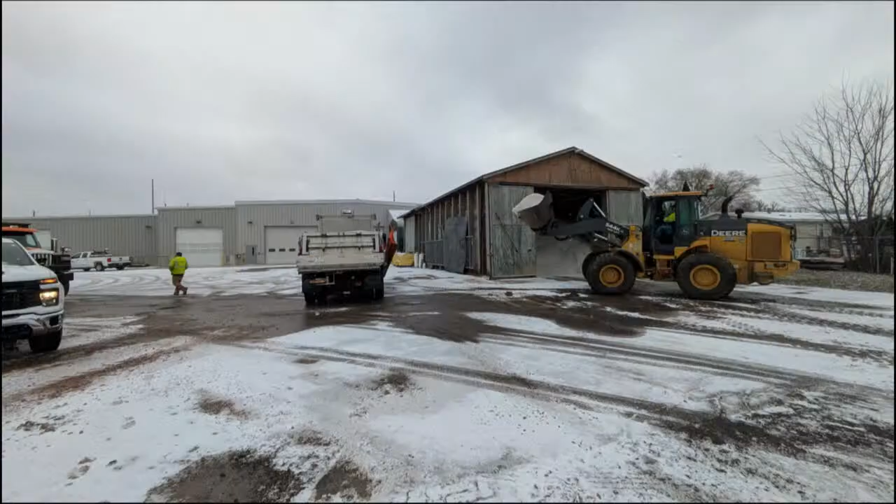This is just a shot, if no one's ever seen this, in the back of our yard. This is our salt shed. We are loading up trucks here. Dwayne is very proactive about monitoring our quantities, making sure that we're always going to have enough for any snow event. This is just loading up the truck.

With the lack of snow, we've also been taking advantage of the opportunity to fill potholes. It's always nice when you can do it now instead of having a million of them in the spring.

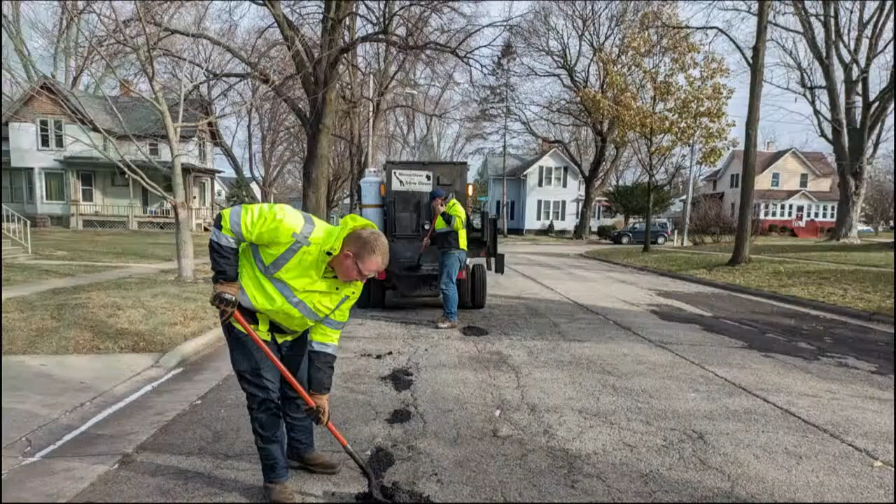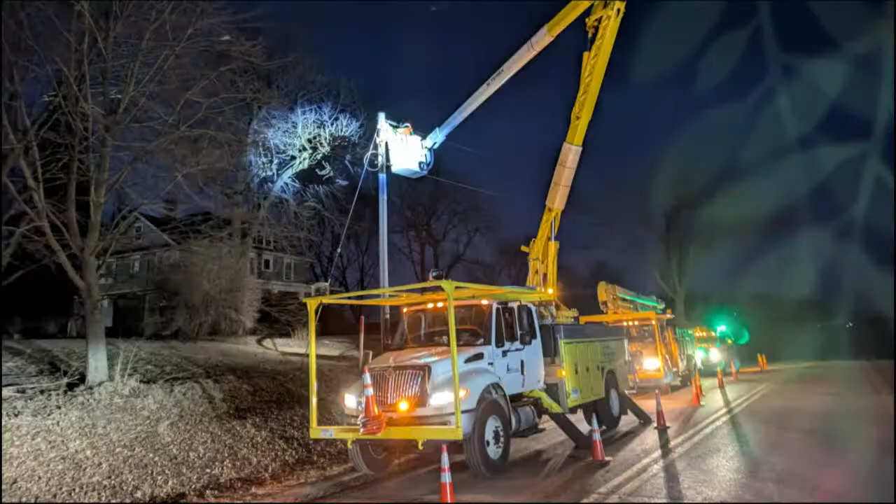Electric department has been very busy. The recent windstorms last week caused a number of localized power outages, so we're doing a lot of troubleshooting, a couple of late nights, particularly out to the north of us on Highway G, near Dolph Dairy. The high winds were shaking that pole, and it actually broke the cutout, the ceramic cutout.

What was most dangerous out here was just the traffic. There wasn't a lot, but when cars would come in, they just don't slow down, and it gets very dangerous.

Here they've replaced the cutout, which is up there, and one of the linemen is now using a stick to close it, and it was successful, so we were able to move on from this.

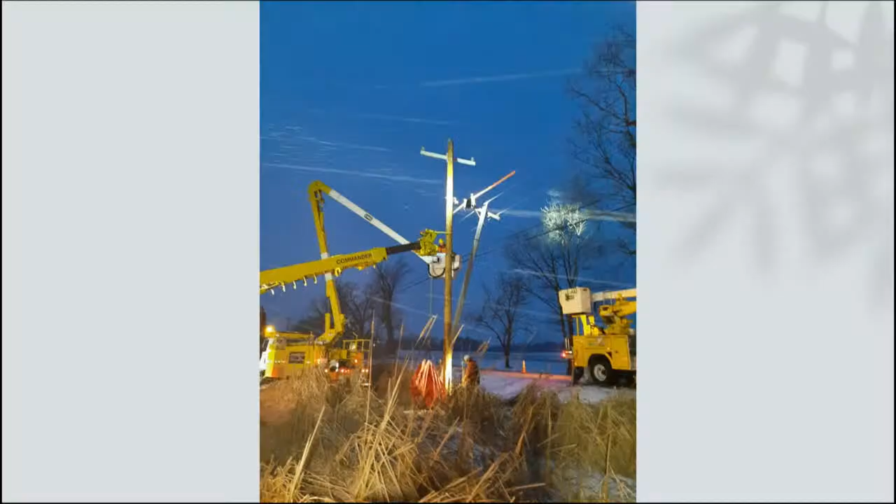Then further up the road, this particular pole, the one on the angle, had busted right at the base. A lot of these poles are older, they are in very acidic soil, which eats away at the wood. So this is a frequent occurrence at times in high winds.

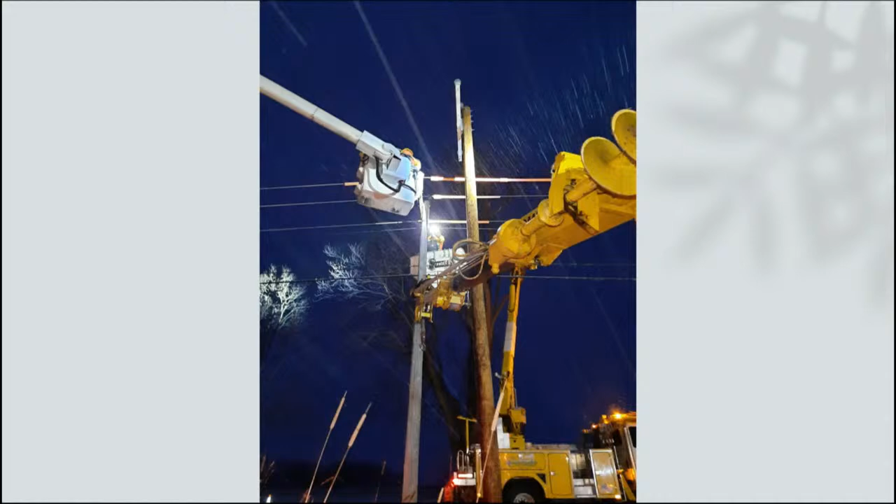They're planting the new pole, then they're gonna hold this one and then remove it. That's what they're doing there. The arm there is clawing onto the old pole and they're taking it down now.

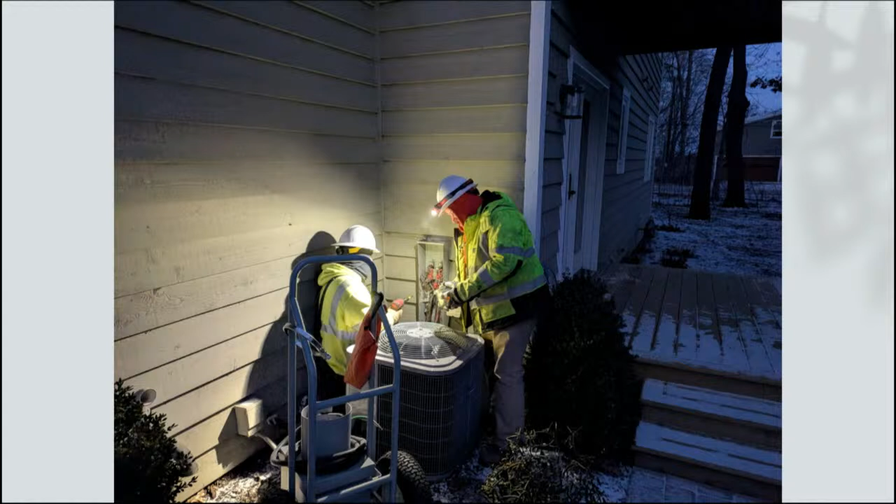That's what the fellows are doing here. They're attaching the service saver and then splicing it in with the existing lines there, the 3 power lines, and then they're gonna come back when temperatures warm up a bit more, but this house was able to maintain its power then for the next 3 days.

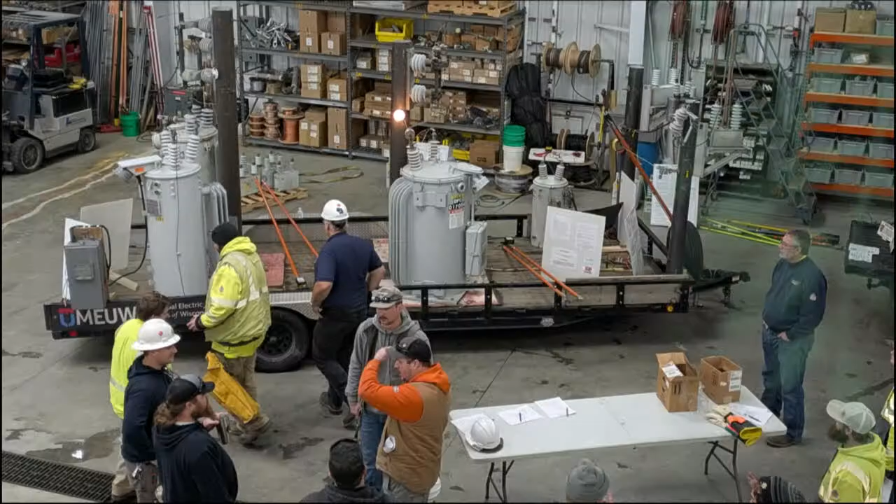Last week, MEUW, they are a safety organization, hosted their regional safety seminars at our facility. So all the local municipalities that have their own power companies gather here, and they bring in this really cool trailer. These large transformers are dead, but he has rigged them so that

he plugs them up to a 120 volt, they are re-energized. And then the crew just, this is a training day. Safety is paramount. It's so quick that an accident can happen, and it can be fatal at times or cause serious injury. So it's very important that these crews, everyone meets about twice a year and performs a number of routine tasks.

Here's two of our guys, this is Austin and this is Lucas. They're just practicing what they actually were working on last week, a recloser or a cutout. This gentleman here is from Columbus.

And they're just wrapping up the lecture time.

Another big project we have just tackled, this is the CP substation. What we have here is our 25 kV line coming into it, and then it transforms down into our 4 kVs, and this is circuit 1.

We have had a problem with what is called a recloser. I believe I've talked to the board about this, tried to explain some of it. We've had a recloser that's been out for some time. This type of system and device is outdated, so it's hard to get new ones, but we were able to reach out to another municipality in Hartford that had an extra one they did not use, and they graciously gave it to us at no cost.

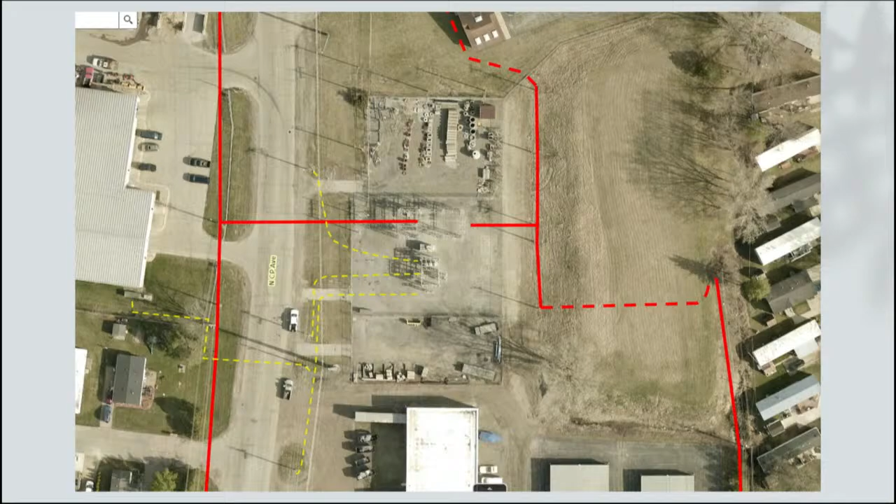This is typically, if it's the fault, it could be a branch that fell on the lines. So this will turn back on its own, but if the fault still exists, it will go out again, and it will try one more time or 2 more times to kick it back on.

After the third try, that's when it will shut down completely and we'll have to head out there. This is how sometimes you'll get a blip, because this recloser is turning the power back on automatically.

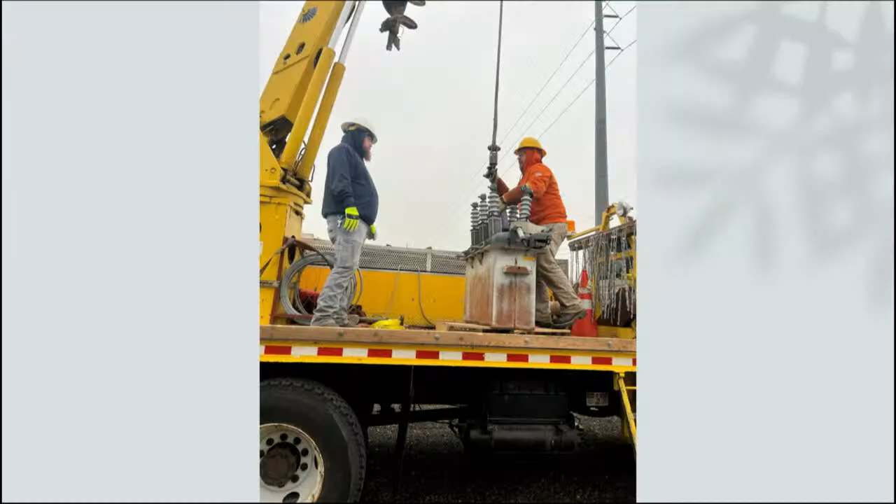But this one had malfunctioned and had been sitting dormant for about two months. The crews, we were very lucky to get a used one. Here they're putting the refurbished one back in. We anticipate having to keep that there for a year, and then we'll be shutting down the CP substation with some upgrades we'll be doing at our Tyranita substation.

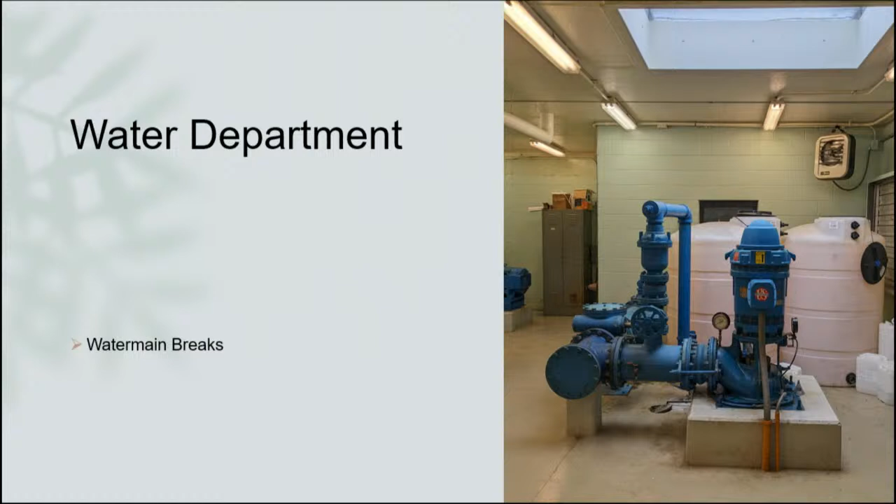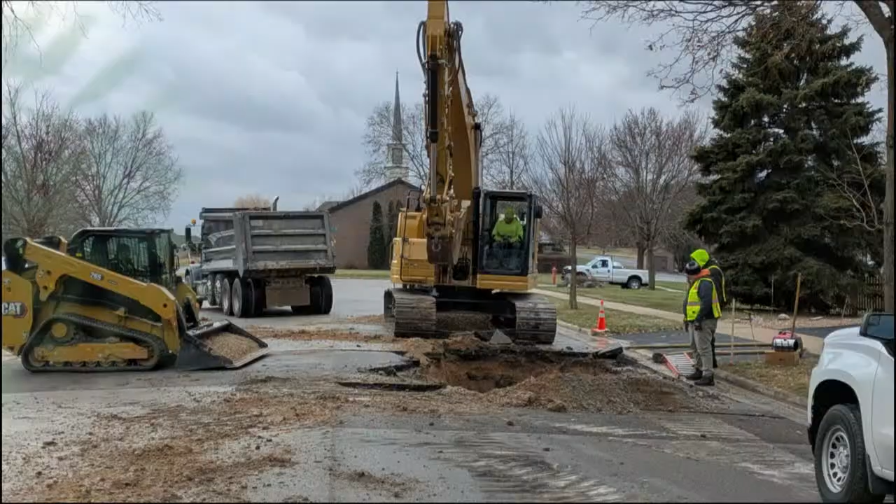The two on Grove - this one here, right at the intersection with Jefferson, was very serious. This is on the top of the hill at Grove. We had to go rather deep for this one.

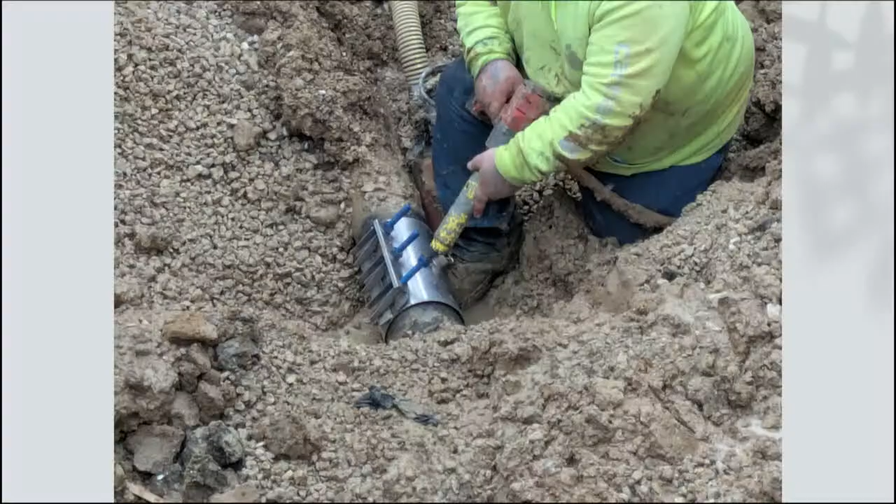What you'll see here is a typical repair. This is called a Hymax sleeve. These come in different lengths and different diameters, but they have a membrane on the inside of that metal collar. You're able to fasten that on and seal up the break, and that normally is 100% successful.

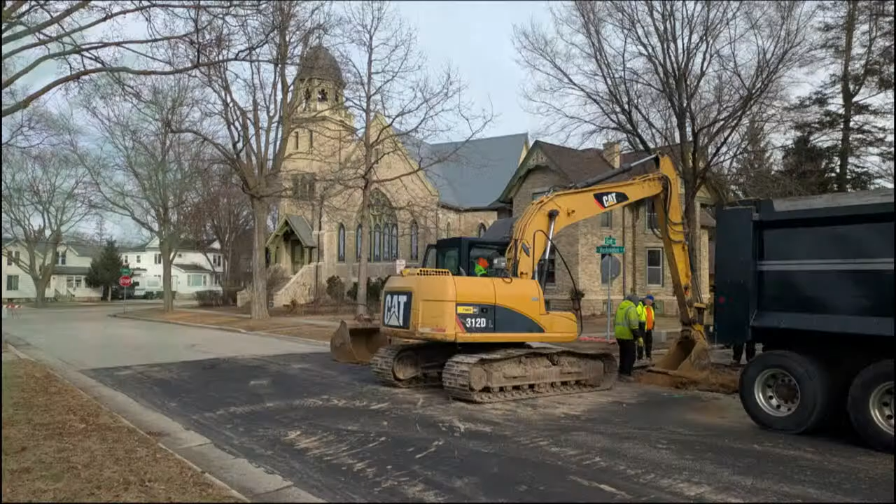This is at Washington and Scott. This one was a problem to find - it was not immediately evident where the break was, so we had to go searching for it, and the hole got a bit larger than we wanted, unfortunately, but we did eventually find the repair.

Now this one was at the bottom of Grove and Jefferson. Unfortunately, it starts freezing then too, so we were having very slippery conditions as vehicles were coming down the road. We spent a lot of time just trying to keep traction there and trying to limit traffic away from the area.

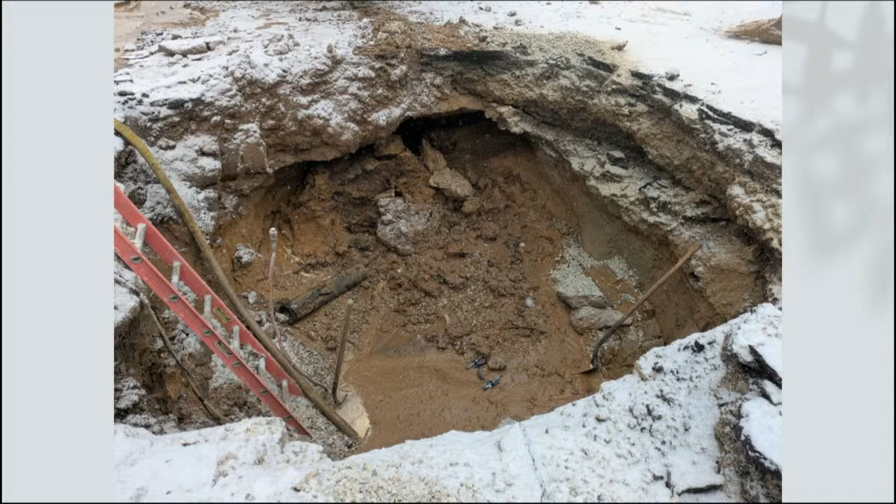Another problem we had, two other problems are evident here. We were having trench instability, so we had to bring in a trench box. You can see the trench caving in here, and this was a continual problem - the more you dug, the bigger it got.

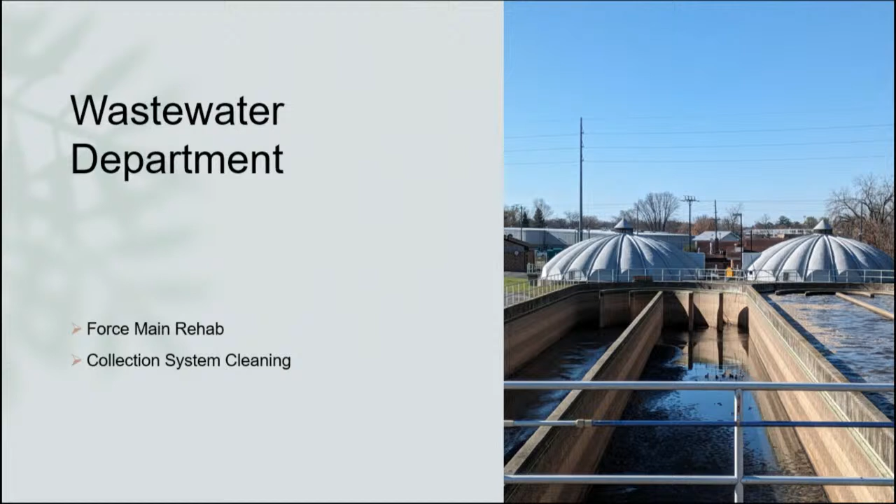In wastewater, we undertook a lining project for a sewer main that goes underneath what is called the Conger Canal on the other side of the lake. One of our operators, two of them actually, were doing their routine televising and televised this run, from one manhole to the next, and found that this pipe that goes under the Conger Canal was in disrepair. So the decision was made quickly, for remediation, to line it.

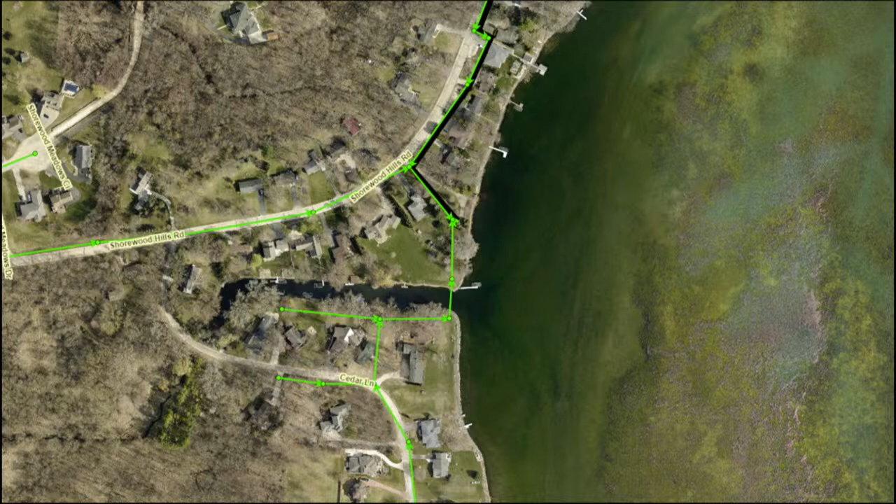Dwayne and I consulted with Bill Kiesling, our foreman, and we immediately contacted Hammerhead in town here, and they put us in contact with a good contractor called Sewer Ninjas. Dwayne and I spent many hours, but the whole team spent about a day just planning and putting together an action plan.

So this is Conger Canal. The flow goes this way, underneath the canal, and eventually up here to a lift station. But this run right here, the pipe is encased in concrete, and it was showing a good deal of deterioration.

I was told by one of the neighbors that when they conducted some dredging out there, they observed the excavator getting hung up on something right in this area, and instead of being cautious, just started tugging on it. We saw no signs of a break in the system, but there was just some disjointing.

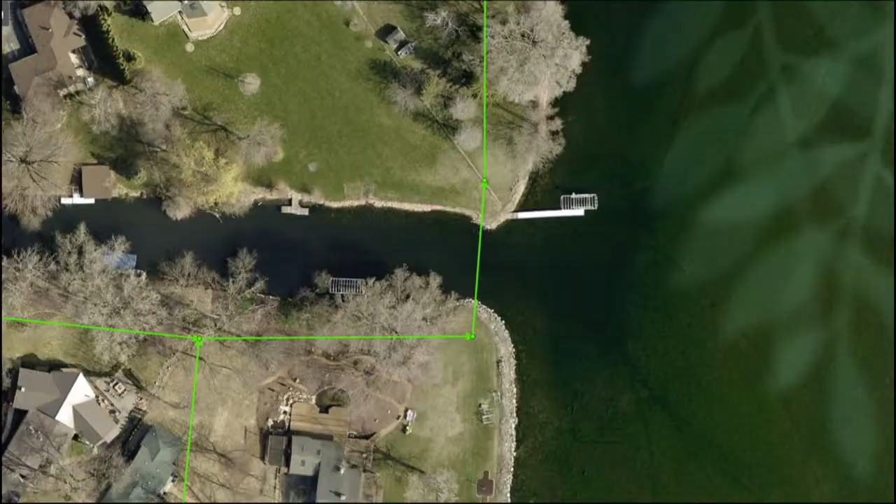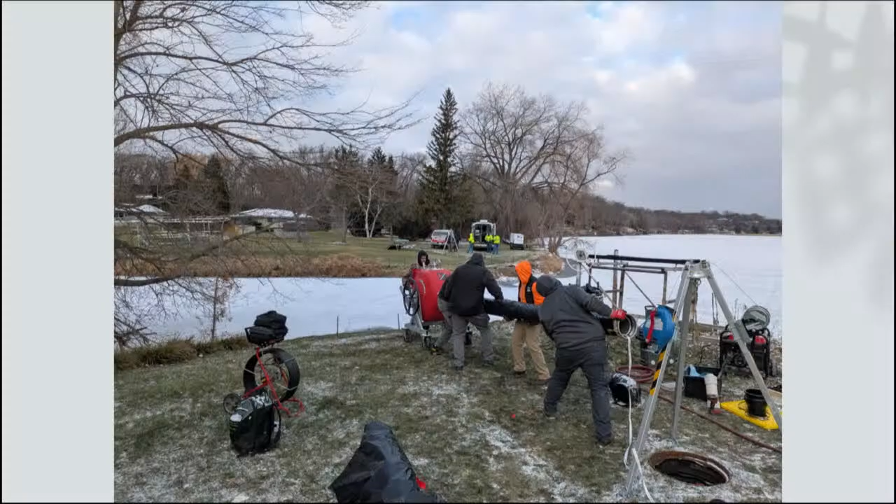Slide. So this is the delivery system. They're going to lower this down into the manhole and into the pipe, and then they start injecting their... what would you call that, Dwayne? I'd call it a polyurethane type liner. Slide.

Slide. Before we get to the two videos, I just want to say that we currently have two projects open. Matt here is going to be discussing the Milton Street and Linden Street projects. But if you could play the first video, please, Dave. No, that's the second one.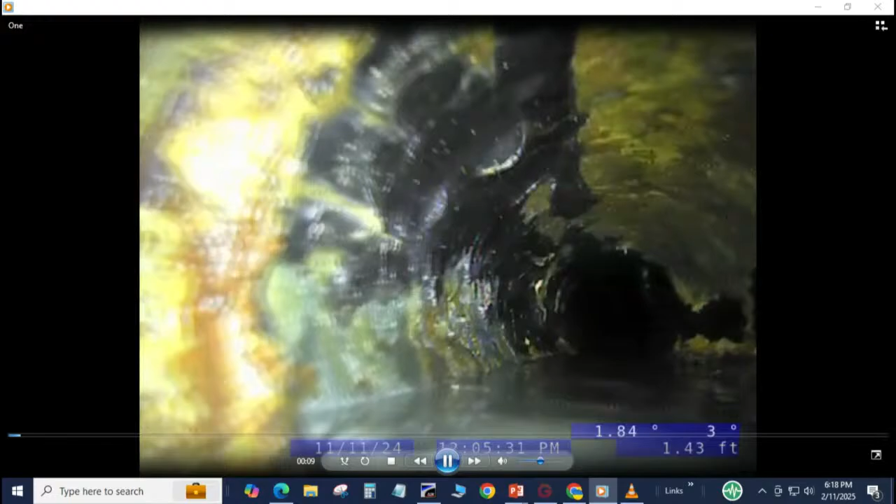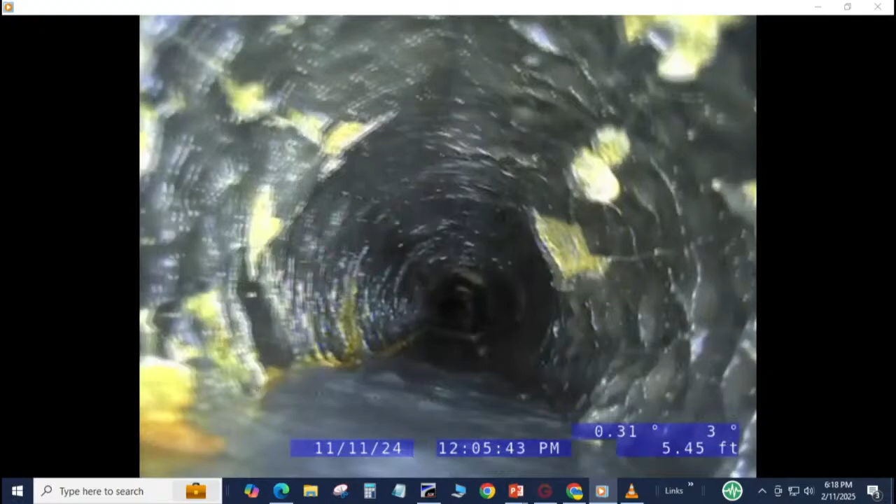All right, hit play. So this was the initial televising of the pipe. We are going underneath the canal, starting on the north, going south. You can see the metal pipe here is corroded away. This is concrete here, the encasement, and many examples of that. So it was determined right away that we needed to do something.

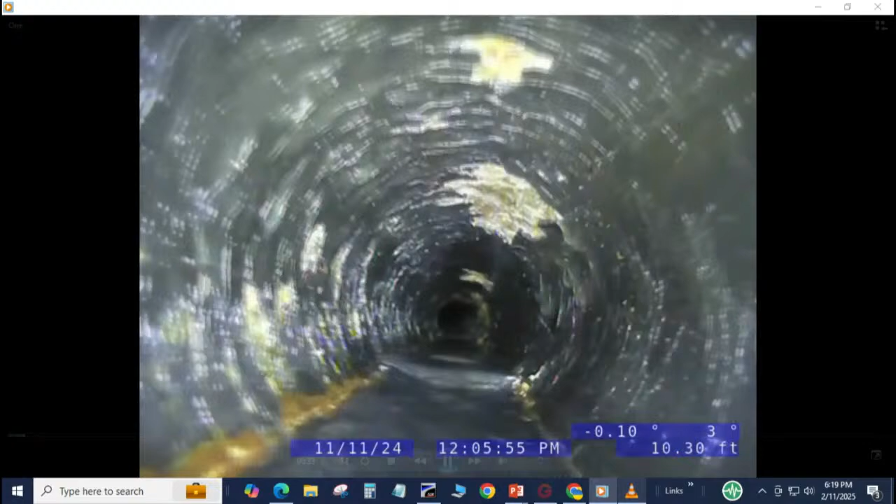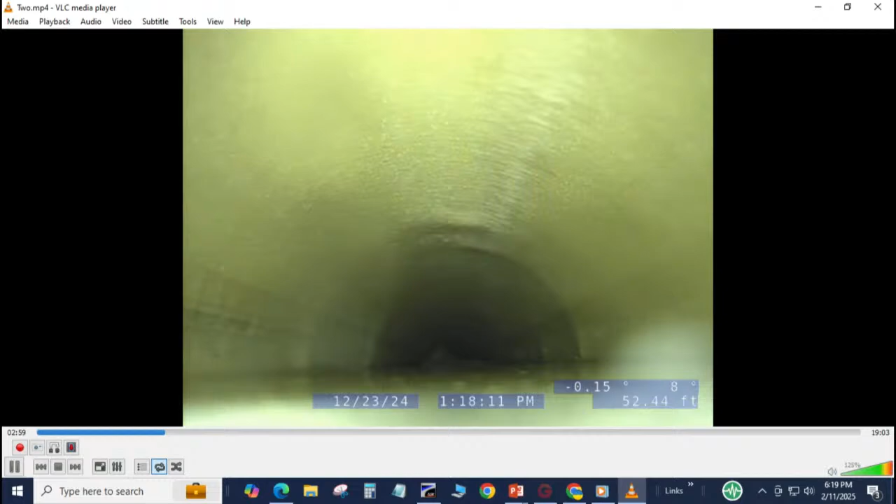Okay, you can stop that, Dave, and play number two, please. And hit play. This is the lined product. You can see it's much smoother now. This will outlive everyone in this room, this system. It is a long-term solution. Not only can the sewer be delivered now, but it will protect the integrity of the lake.

Thank you, Dave. That is all I have for a report. Does anyone have any questions for me? Any questions for Randy? An inch thick. Any other questions? Nope. Hearing none, I guess we move on to the Milton and Linden Street project.

Thank you. Dave, can you pull up the presentation, please? As that's getting pulled up, I've been in front of the board for a number of years. I don't know all of you, but I do recognize a few faces. My name is Matt Hoslett with Strand Associates. I will be the project manager on the Milton Street reconstruction and Linden Street. Pardon me, I'm battling a little tickle in my throat the last couple of days.

The Linden Street utility extension. A little bit of background about me: I've been with Strand Associates for about 7.5 years out of college, specifically working in Lake Mills for about the last 6 years. I've been on pretty much all of the road construction projects the last number of years, starting with Mulberry Street, Oak, College, and all the Brookstone phases we've been up to.

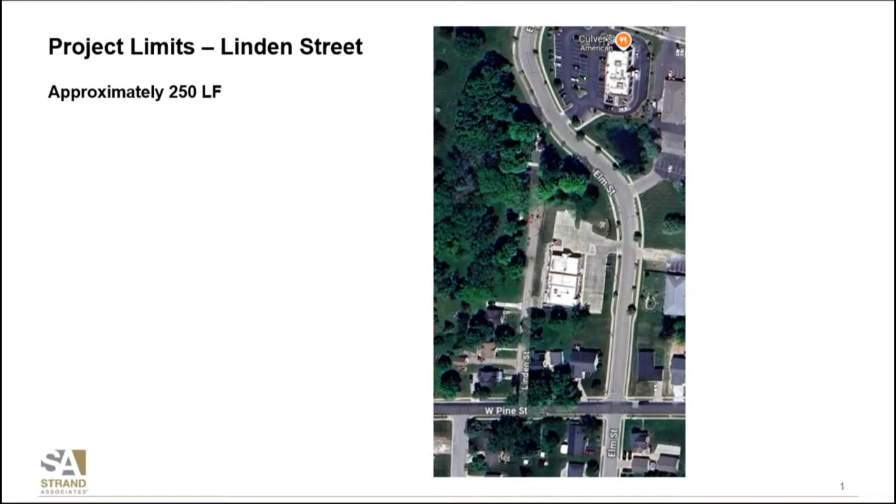Next, Linden Street. Linden Street was added on earlier in 2025 from the annexation we heard about a little bit ago from the Arndt property. This is just going to be a sewer and water utility extension, stubbing out water services and sanitary sewer service for possible future annexations to the other properties. We are only going up about 250 feet from Pine Street. We are not anticipating touching the apron or the concrete sidewalk.

That's a relatively simple construction process. Next, the anticipated project schedule: right now we have the bid opening on March 20th with anticipated spring construction start. We will leave the window open for the contractor to start as possibly as soon as end of April, extending through substantial completion before school starts at the end of August.

While we do have a big window for the contractor to complete the work, we will put a mandated contract completion of 10 weeks upon the start of the project. So as soon as the contractor starts, they will have to have completion within 10 weeks. That helps so the contractor isn't able to leave and be gone for weeks at a time with no work being done on the street.

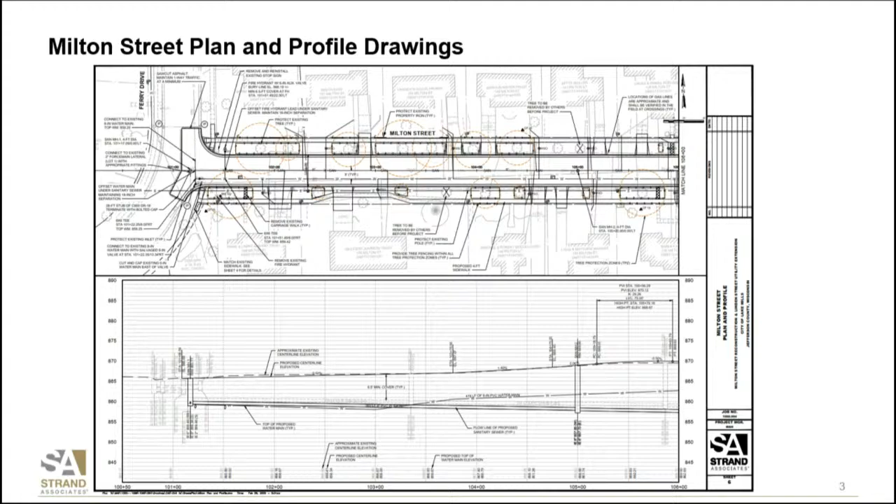Next. So I know in your packets you have the full drawing set. I did grab just a couple sheets here of the plan profile drawings. It shows the replacement of the sanitary sewer and the water main along with sidewalk replacement.

You'll see the circles, and I'll touch on this a little bit. Those are our tree protection zone radiuses of each tree that was surveyed from Eric and his staff.

You will note that there is no storm sewer being either added or replaced. That is due to the profile of the road. It is such a short stretch from the high point in the direct middle of the road that the watersheds aren't large enough to have a storm sewer system. There is storm sewer on Ferry Drive and on Main Street that will collect the storm water.

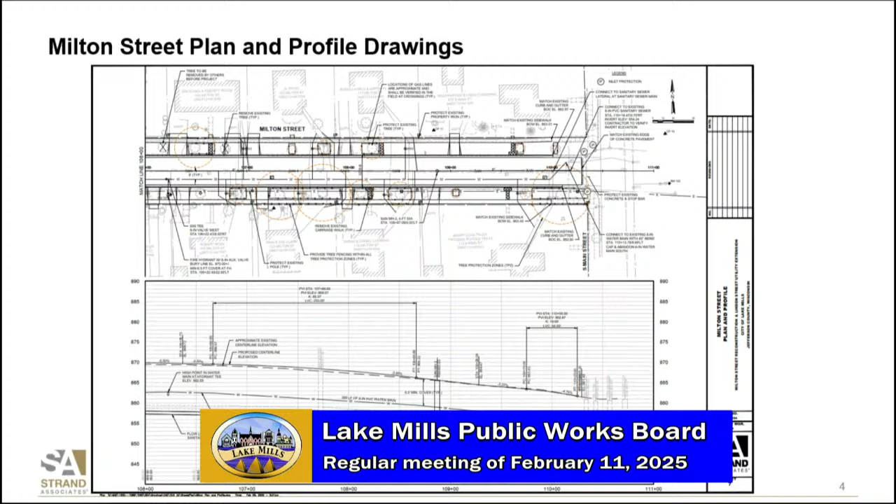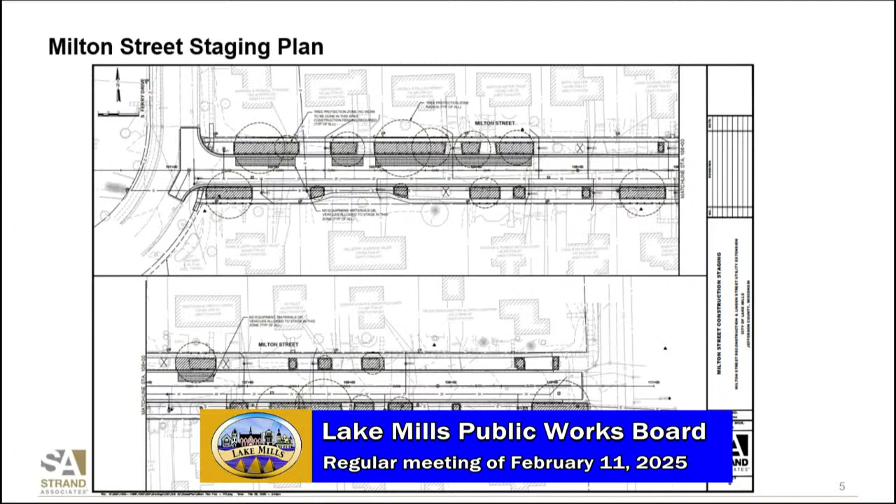And like I said, I'll touch base more on the tree protection policy as we get later on here. Next, Dave.

As I mentioned, Linden Street is a sewer and water only utility extension. We are only replacing the roadway width. We are not adding curb and gutter to this, as it is basically a replace in kind project.

Asphalt replacement, we will have on the south side of Linden Street, there will be what's called a screed curb that is going to be formed with asphalt to allow basically the collection of water.

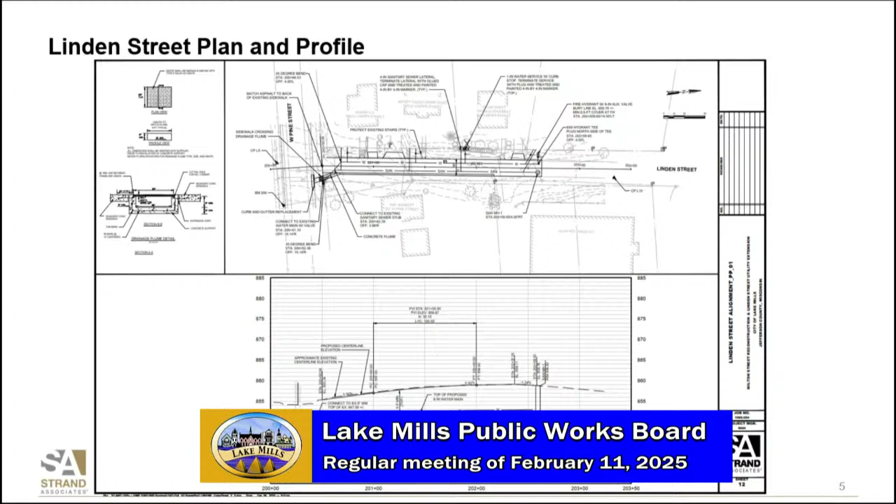As you're looking at this, all the water drains from the cemetery down to the south. We're looking west or south to north, left to right. So from the west side, all that water comes down. So to help eliminate water going across the road as it is now into that property on the east, we're going to be catching it with a screed curb that will have about a 4-inch lip at about a 45-degree angle.

That will catch that water and bring it down to the sidewalk there, which we are proposing to put in a concrete flume that will go underneath the sidewalk and then outlet onto Pine Street and then east to Elm.

Next slide, please, Dave. So the meat of this presentation is going to fall under the tree protection policy that we are incorporating in this project. This is the first year, obviously, since it was passed in June of '24, that we will have a tree protection policy in place during construction.

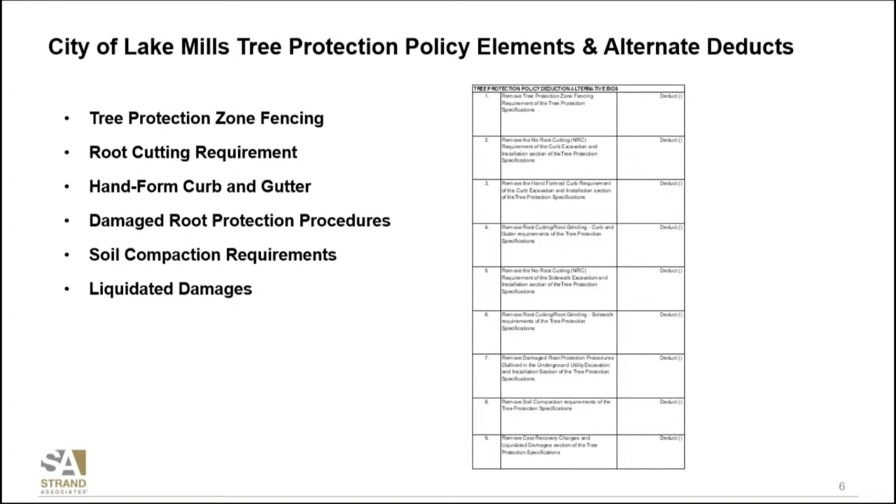We will include the specifications in our contract. The entire project, the base bid, will have each one of these tree protection policy items included. The way the spec is written and the opinion of cost is showing, there will be deductions to help quantify and get a price of what each one of these items ultimately will cost. It is hard to quantify, I will admit, because we don't know how much it is going to cost for each one of these items, but let's just go through each element of the tree protection zone.

We have the fencing. That will be an orange fence that will be from the back of the curb to the front of the sidewalk in the terrace, and it basically shows no work allowed in that zone.

There is a root cutting requirement. Everything is kind of spelled out in the specifications. It spells out different size roots that possibly are damaged and what to do in each scenario. There may be cases of hand forming some curb and gutter when a machine pour curb and gutter is not allowed due to roots that are in close proximity of the excavation for the curb.

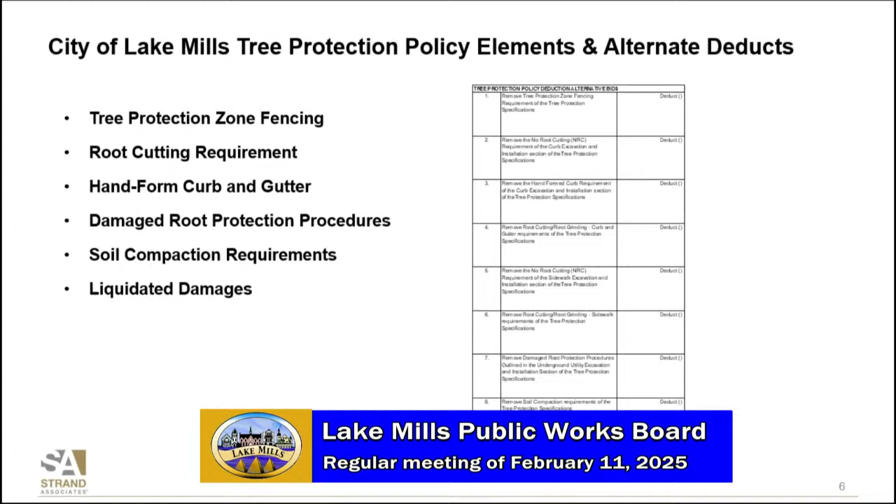There is some language in the specifications about what to do during damaged root protection procedures. So if a root would be damaged, what kind of actions to go through to help clean cut that root and help seal it up.

Soil compaction requirements. There are soil compaction requirements, that is primarily showing that staging plan that I referenced, to not allow any heavy equipment or machine or material stationary right over a tree root. But these tree protection zone fencing will help the contractor not place material or equipment within that zone. At the end of the specifications, there is language about liquidated damages on a number of different items.

There are liquidated damages for root damage. This was the development of a tree protection policy during city infrastructure projects.

The council last year adopted it as a pilot. So what they wanted to do is go through the bidding process and quantify what the cost of implementing these procedures is going to be, which is why you see the deducts listed there, so we'll be able to see exactly what the cost of implementation is on this project, so a decision can be made and a cost-benefit analysis can be completed.

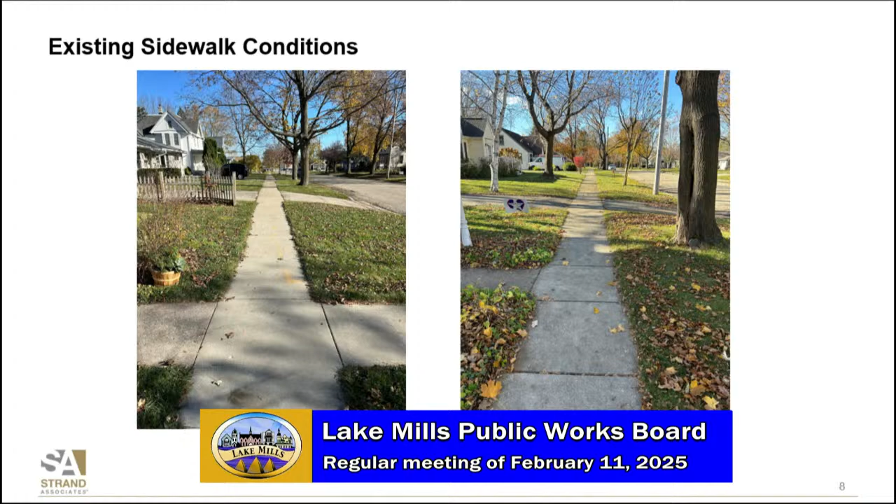We did that on College Street two years ago, and it wouldn't add a unit cost for spot replace, because everything is going to be hand formed anyway. So it's not like it would add additional labor cost if we did a spot replace.

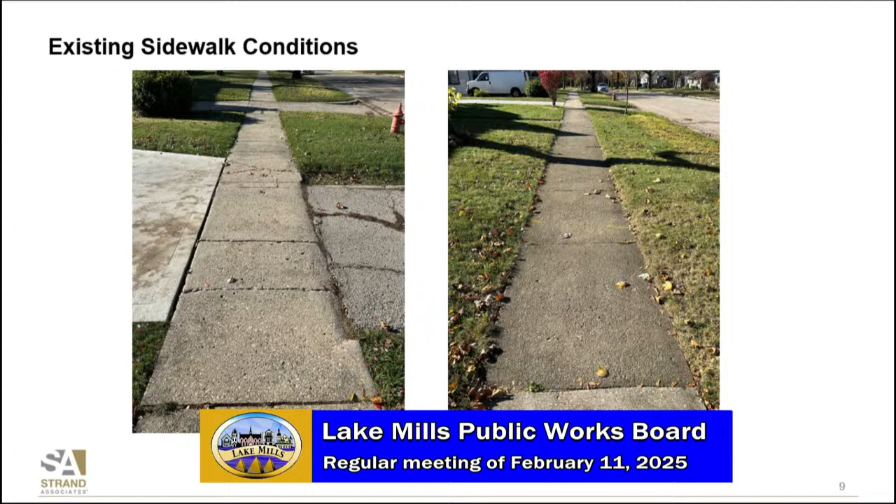These are examples of maybe some sidewalk that we would not save, either heaving, cracking, pitting, where you can see the aggregate in the concrete.

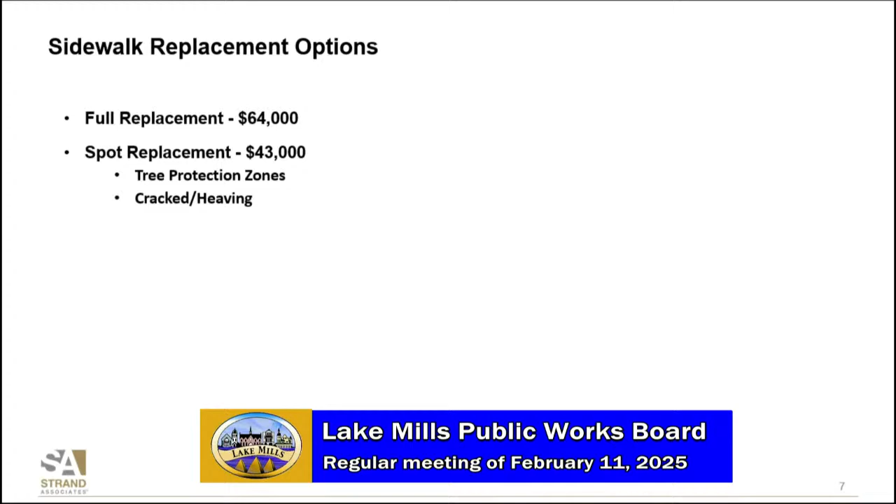Just some costs here to show what I was talking about. A full replacement, looking at about $64,000. A spot replacement, this was assumed at about a third of the sidewalk could be saved, either from the tree protection zones or from the cracking and heaving, quantified at about $43,000. Now, I don't want you to get caught on these numbers, because as we go through construction, if we can save more, then we wouldn't be spending as much on the sidewalk replacement.

The electric on Milton Street, this was added a few weeks ago. A little background, Strand has been working with city staff during the design of Milton Street, more specifically the Milton Street electric. We came to the conclusion of going full underground from the east side of Main Street underneath 89 and then all the way to Ferry Drive with full underground electric. We will be saving 2 poles that have overhead services on those. If you have more questions about that, Randy and I can provide answers to why that may be.

In the contract, the contractor would be responsible for boring and pulling of the conduit, and then the city electric staff would be responsible for the rest of the work. Only thing I'd add there is, as he stated, this would all be directionally drilled, all bored. There wouldn't be trenching, and that's consistent with the tree protection policy as well. I can't guarantee you anything, but we will be shooting to get under the root structure rather than trenching through the root structure.

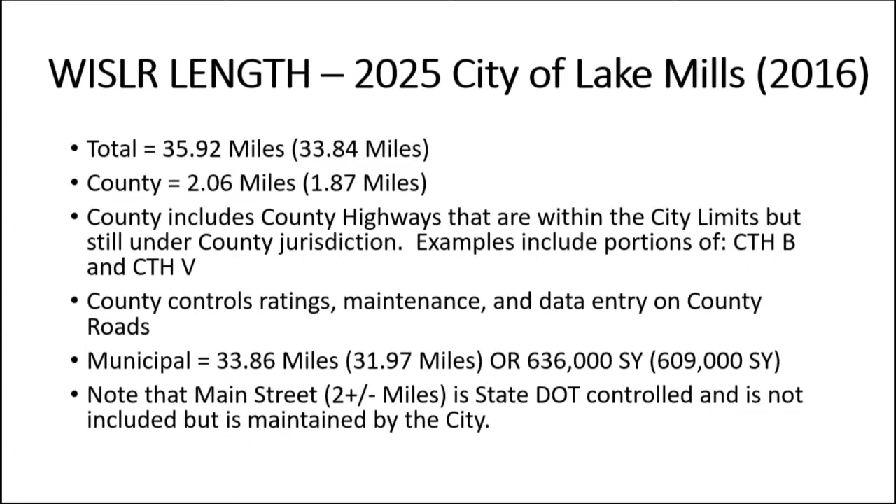Next slide, please, Dave. From 2016, and this is just from the PASER manual. This kind of explains what our PASER ratings are in the Wisconsin DOT database, 10 being an excellent brand new road, 1 being a failed road that is basically gravel.

There are some parameters that we use of when typically a 10 will be a street we just reconstructed, so next year Milton Street will be a 10. It will be a 10 for 1 year. Once that year is over, it will drop to a 9 automatically.

There are, on this slide, some possible treatment conditions or maintenance that can be done. And in the middle column, it kind of talks about what you see on the street when typically you're in these ratings. Obviously excellent to very good to fair, and so on down the line to 1.

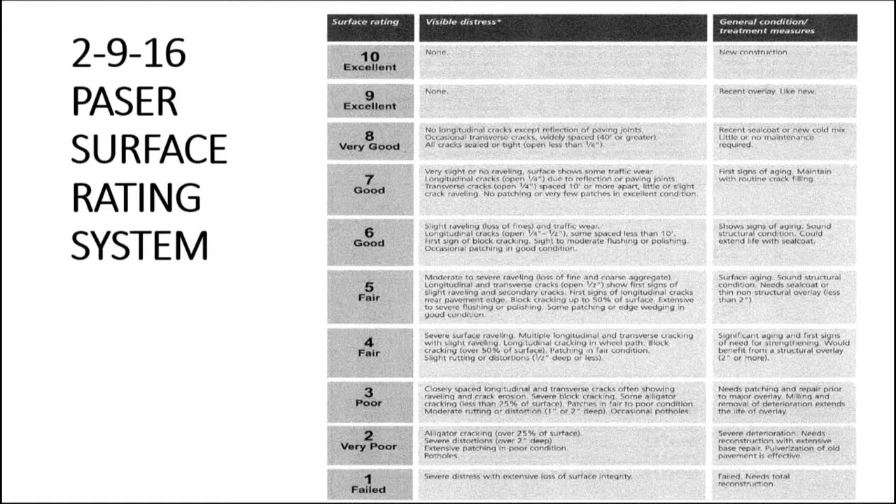Next slide, please. This is an old slide, but it does show how this program that we're going to talk about a little bit more, from 2016, how the ratings have increased. The last time I actually put the percentages to it was in 2022. I would suspect that the pie chart on the right will look similar if I did that today.

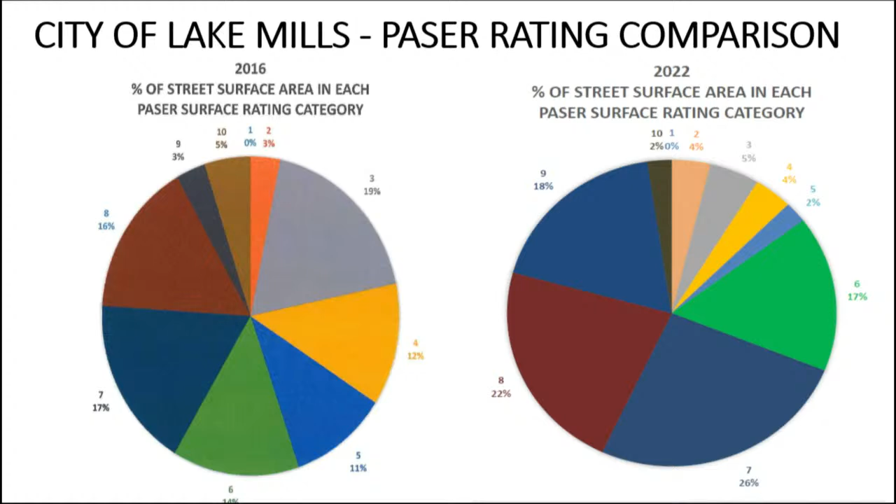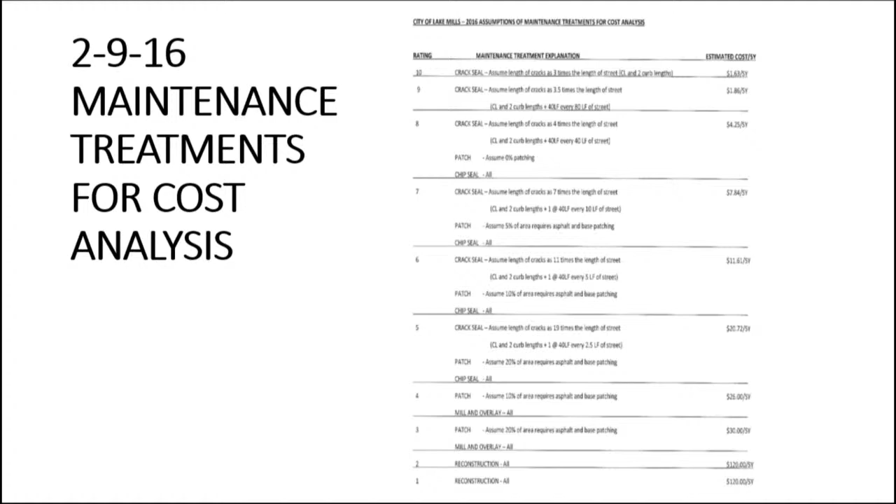While it says 120 on this slide, our projections in our CIP last year were $400 a foot. So that has dramatically increased. That $400 will include curb, which the 120 probably does not, but it gives you an idea of how incrementally and exponentially those prices go up when you get to a reconstruction versus maybe just a chip seal or a crack fill. And what we're doing is trying to prolong that life.

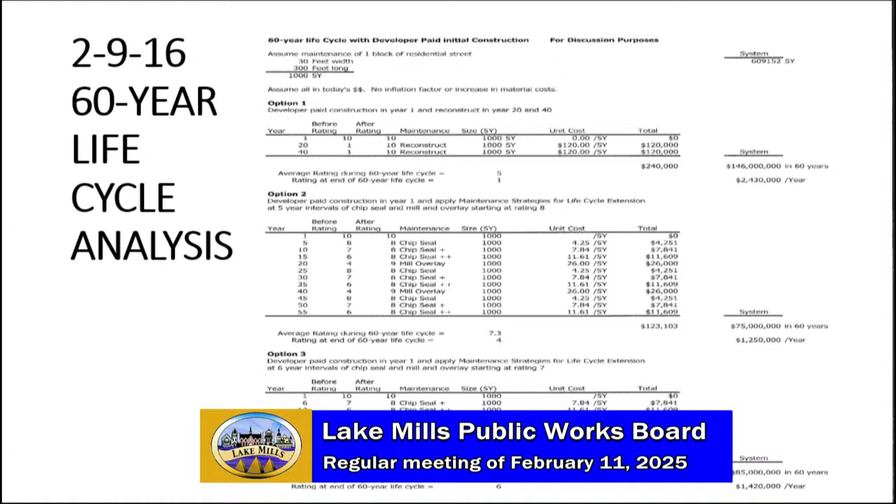Next slide. And here's the analysis in '16 that was done. The first option looked at if the city did no maintenance work and had to replace and reconstruct every 20 years, every road in the city, you would be budgeting over about $2.5 million in 2016 dollars every year to maintain that system. The second option looked at a 5-year interval of maintenance using chip seal and mill and overlay and a series of work every 5 years. You can notice on the far right side that number dropped to $1.25 million per year to expend.

The third option that we showed at that time was a 6-year interval, and you can see that number is now starting to increase back up to $1.42 million. So there is a sweet spot in there between probably option 2 and option 3. But ultimately, as the budgeting process in the Public Works Board at the time determined, we would use a 7-year recurring event as we look at these projects.

Next slide, please. So I kind of preempted that next slide. So what is the street maintenance general plan criteria? It's a 7-year maintenance program. Typical maintenance activities: a 5 to 8 rating is a chip seal, a 3 to 5 rating is a mill and overlay, a 2 to 4 is a pulverization, and a 1 to 3 is a reconstruction. That's the general parameters. After new construction, the goal would be to chip seal every 7 years, 2 to 3 times, and then overlay in a 7-year cycle after that.

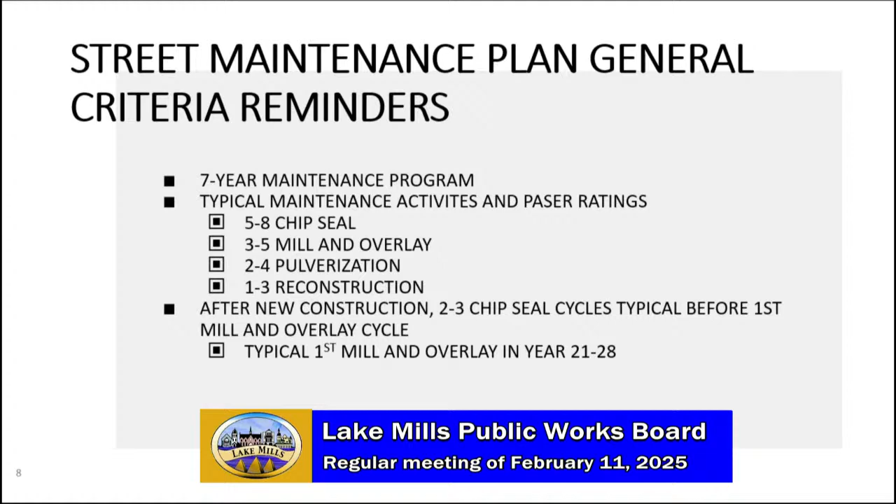So typically with a new street, say the new street that was constructed in Brookstone this year, we would be looking at chip seal, chip seal, chip seal in year 7, 14, and 21, and then probably a mill and overlay in year 28. So now we're out 28 years versus 20, and we've used maintenance activities that cost anywhere from $2 to $10 versus $400. So that's really the meat of what this program does.

This year's program, next slide, Dave. So what does it take to stay current? We need to do about 14% of the streets every year to stay on a 7-year cycle, which would mean in our current system about 4.8 miles worth of work in some shape or form.

The candidate map this year has a candidate of over 10 miles, and I'll explain that a little later, but it has to do with budgeting 7 years ago. The candidate list is higher because of the budgets in '17 and '18. 2025, at least the current plan presented tonight, has 2.1 miles of chip seal at a cost estimated at $126,000. So again, 2 miles at $126,000 versus mill and overlay of a half mile for $196,000. And as Matt has talked about tonight, generally just the pavement portion of the street project in the CIP for 0.17 miles of Milton Street is $438,000.

So combination of all that, we're looking at one-year street activities of 2.8 miles for about $750,000. And at that pace, 2.8 miles, we are falling behind because we are falling to a 12-year maintenance pace. A number of reasons for that is because of that budget process and the choice of some of the projects we've done this year.

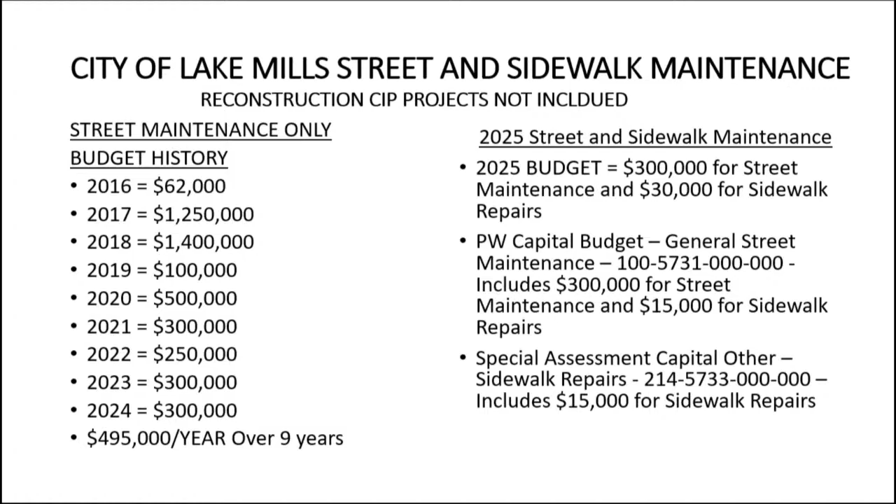Over the 9-year period, it's just shy of $500,000 a year. However, since 2019, generally it's been about $300,000. How does that break down on the right side? $300,000 for street maintenance, $30,000 for sidewalk repairs. $315,000 of that is in the general street maintenance, and $15,000 is in the special assessment.

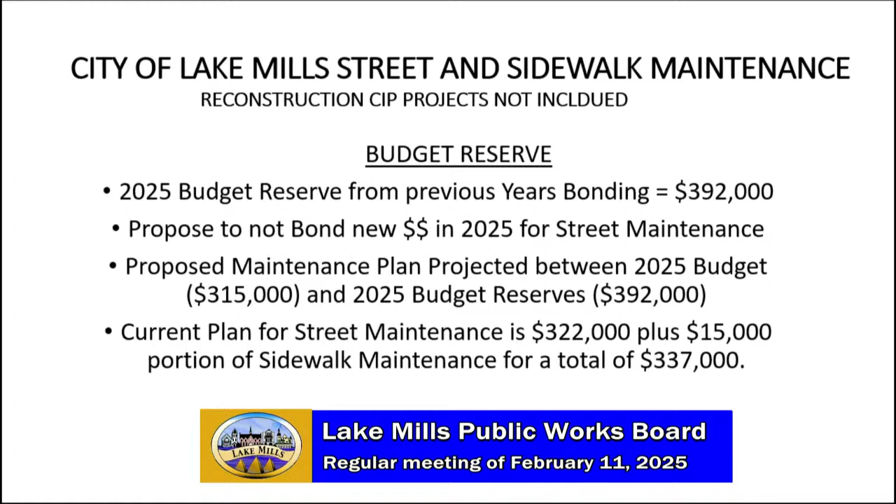Over the last couple years, there's been some reserves from dollars that were bonded. So in 2025, the budget reserve from previous years' work for street maintenance is sitting at $392,000. What staff is proposing is to not bond for new dollars in 2025, and aim for a budget between the 2025 budget, the 315, and the 2025 budget reserves, which is 392. The current plan presented in the packet is for 322,000 plus 15,000 for sidewalk maintenance, for a total of 337, kind of in that spot in between.

Obviously, staff will analyze streets as they come out of the spring. There may be some other changes to the plan as we go through the maintenance of the year, and we'll evaluate the budget as the season goes on and see if there are projects we can add to keep it under and in that range. I believe that's my last slide. So I can either stop here, we can take questions, or if you wanted to go through the maps and spreadsheet, we can. How would you like to do that?